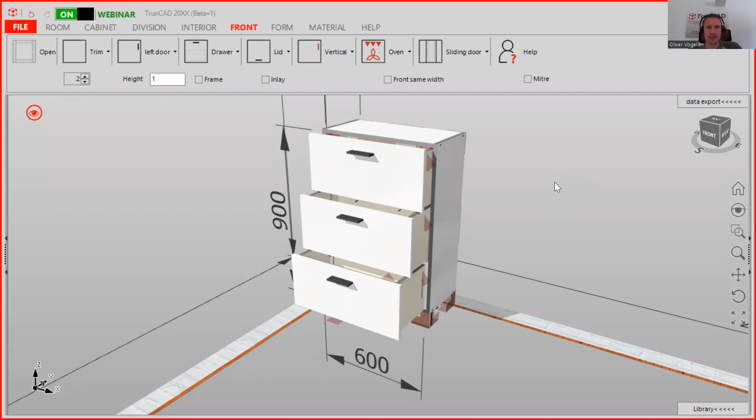Today, you're going to see how to set up wooden drawers. We are here on the front tab and here on drawers. Today the main theme is how to configure your individual wooden drawer. You find it here when you click on this button. You get in settings, and we will go step by step through it.

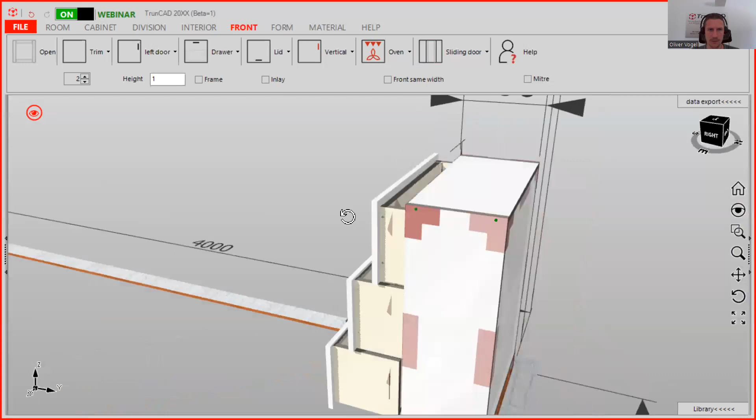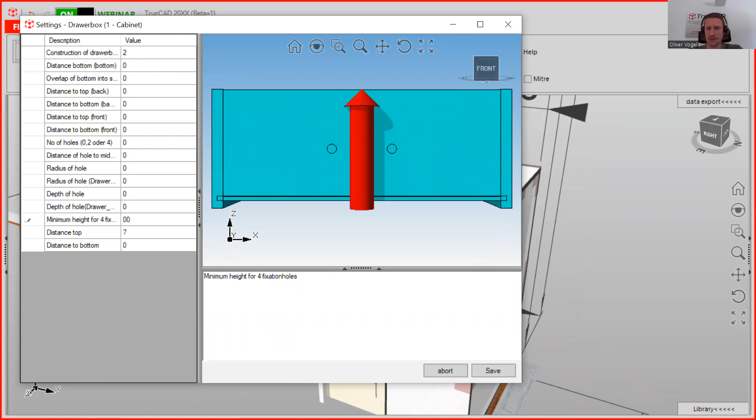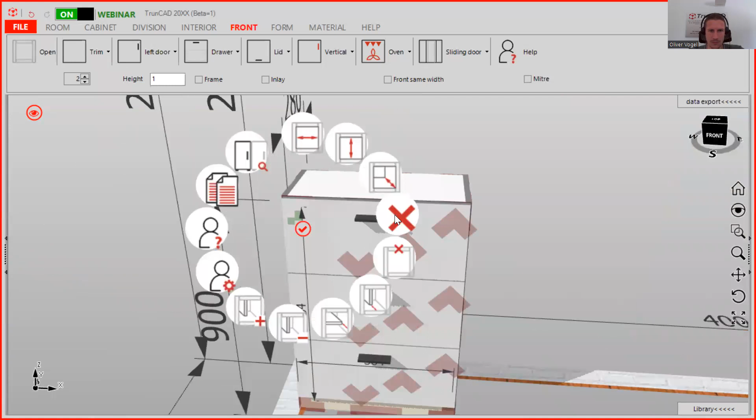So, first of all, I click here again and I set this to 0, so that we can go step by step through it. So we save this. And you see here it's also already changed. So we can close the doors and we are starting a new project.

So first of all, when you make the setup of the drawers, you click here on the front tab and here on the drawer. And here we have the setting for the drawer box, here for the hardware, and here for the connectors. Today we focus on the drawer box, but I also explain what you need to consider in the hardware.

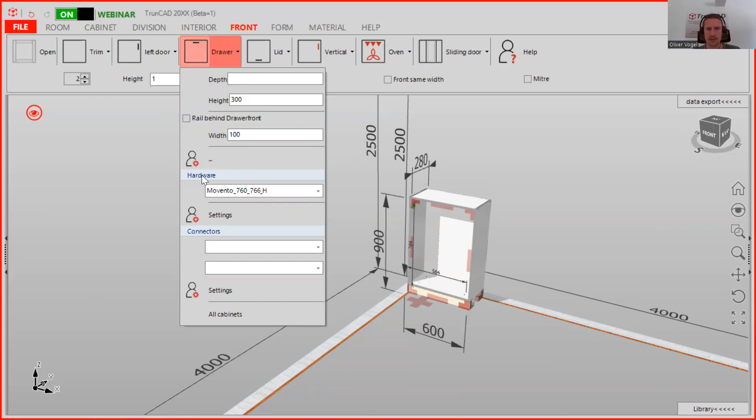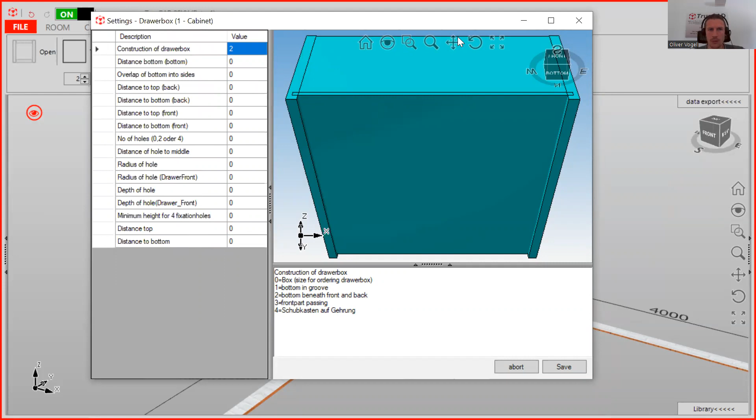So we click on here, and here you see the setting, and you can also click on here to move this. First of all, it's important that you know which construction of drawer box you use. You see here the description, here's the value, here you see the picture, and here also the code. What does 0 mean? 0 means just to have the size for ordering a drawer box. So when you don't manufacture it yourself, you just type in number 0.

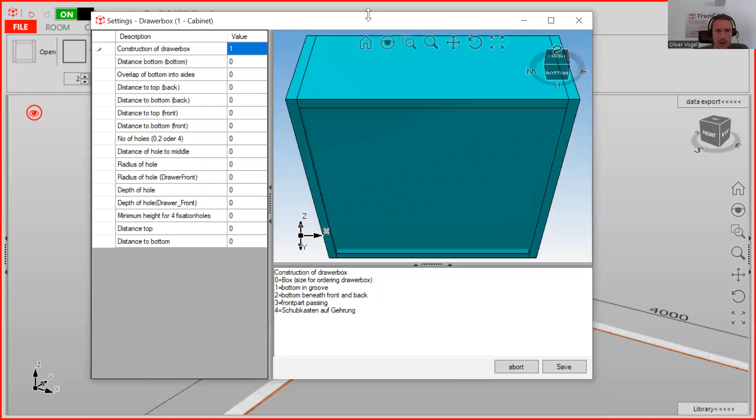When you want number 1, you see here the bottom is in a groove and the sides are going through. When you type in number 2, you have the bottom beneath the front and back. And when you have number 3, it's similar to the first one. Number 1, the sides are going through. Number 3, the front is going through. And number 4 is on miter.

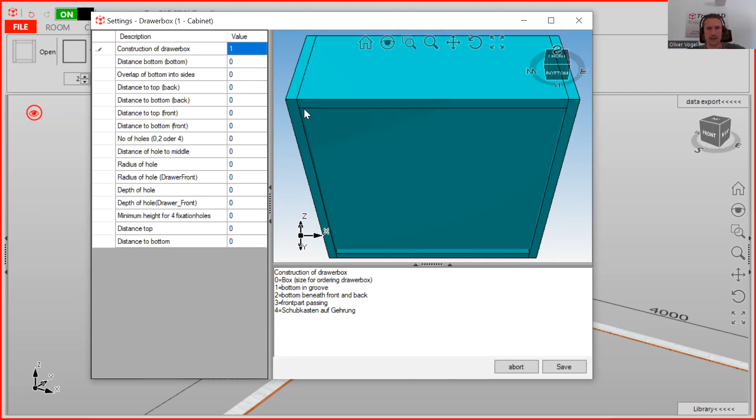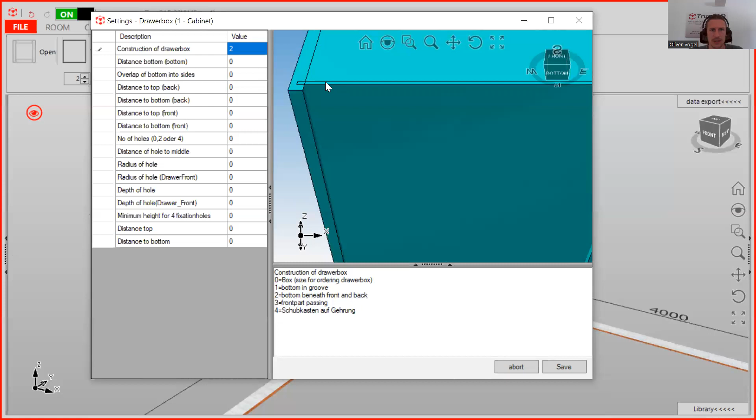Today we use the example of number 2, and you need to consider something, and I show you later on what. Because here on number 2, you see we can have a distance, and later on this will be important to consider. So let's choose number 2, and here you can type in the distance to the bottom.

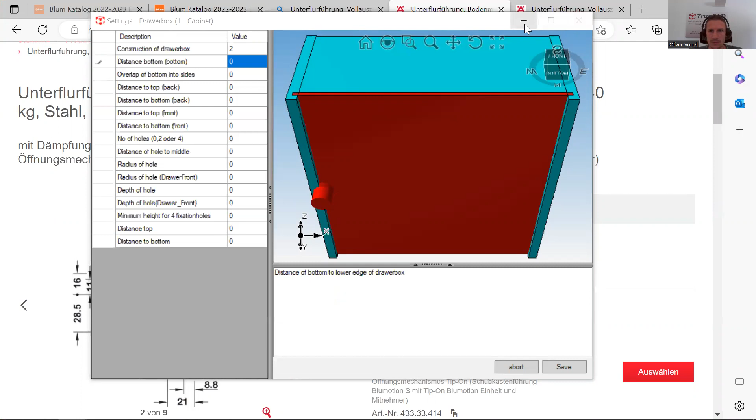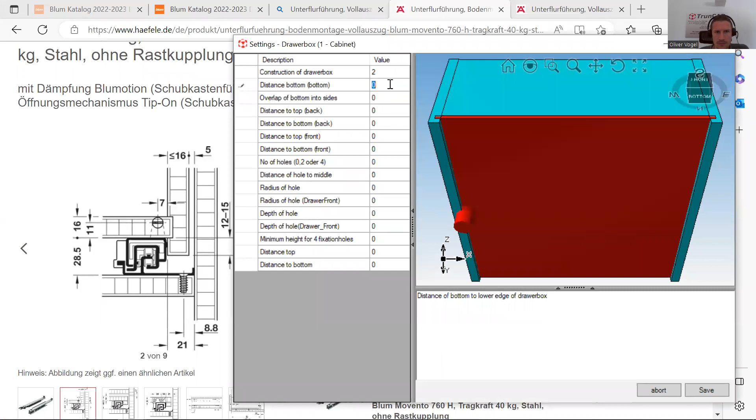Therefore we also need to check the catalog, because we want to use the Movento 760H. And here you see we need to have a distance to the bottom. It has to be 12 to 15 mil. So that's why we choose in our case distance bottom 12. So here that is the overlap of the bottom into the side.

You see it here also. When you click here, it's actually the groove. We want to have the groove, and we just type in 6. And here's the distance top to the back, and we type in 2. And for the bottom, we just keep it 0. And that is the same for the front. We can also type in 2 mil, and the distance to the bottom we can have 0.

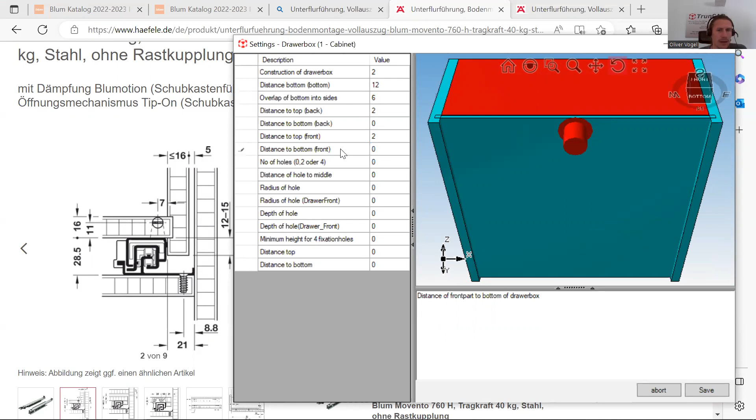So here you see the number of holes. You can have 0, 2, or 4. When we type in 4, you see we get 4 holes for the handle. Here you can also set the minimum height for fixation holes. So you can type in like 250. So when it's smaller than 250, then you automatically get 2 instead of 4 holes. That is then automatically set up.

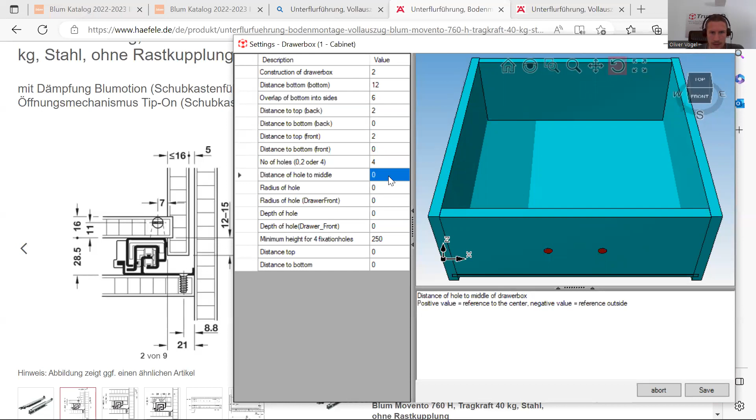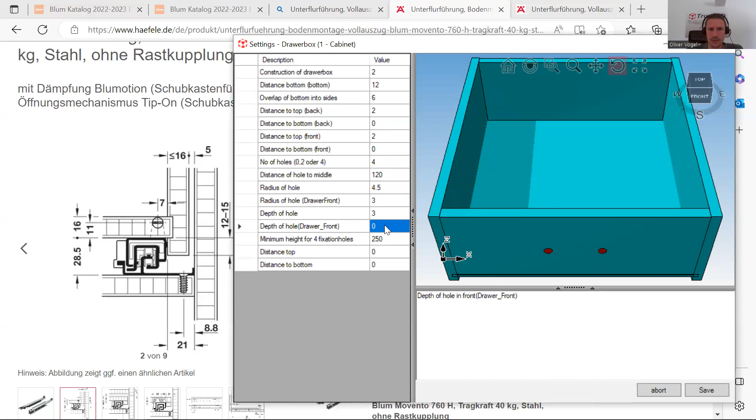And here that is the distance of the holes to the middle, and we can type in 120. Here you can define the radius. We just type in 4.5, and that is the radius of the hole for the drawer front. It can be 3, and that is the depth of the hole. We can have 3, that is just for fixing, and the depth of the hole for the front. When it shall go through, you can type in 1, then it's going through.

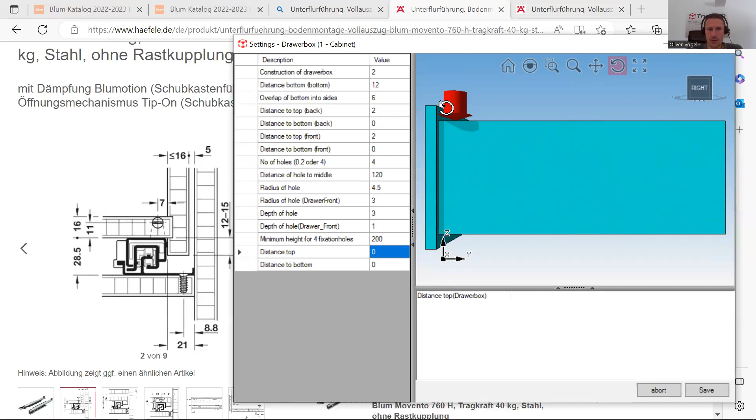So here we have the minimum height. You can also type in 200. And this here is the distance to top, from the drawer side to the top of the front, and we will check it later on. We type in here 7. So when this is set up, you can click here on save, then it's saved. Now what's also important to consider is that we check the measurements.

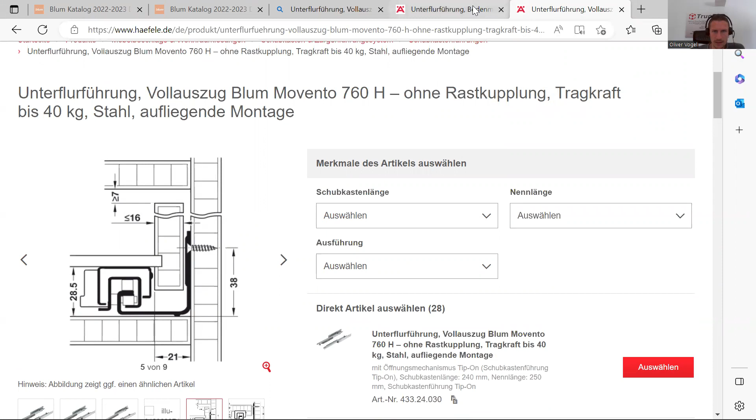So here we have the first drilling to the bottom, which needs to be 38. And here we need to consider, you see here it's 28.5, the distance from the bottom to the shelf here.

So we will go back to TrunCAD, and we go here into the hardware setting. Here you can also choose the Movento 760H. Choose the wooden drawer here, and here you can choose this. And what's important, when we click on here,

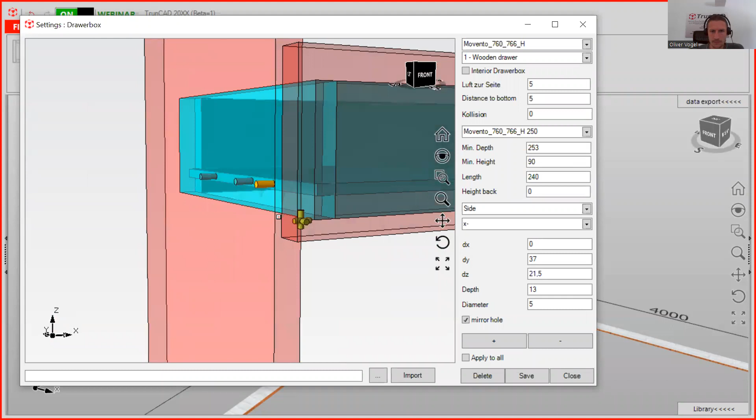you might be confused, because here you see the reference point. The reference point is here on the bottom of the side. And here the distance is 21.5.

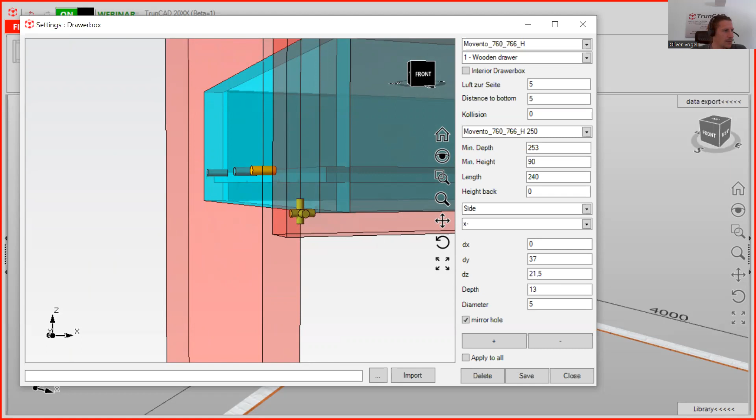So I go back here, and we need to consider this: 28.5 minus 12, that is 16.5. And this 16.5 we need to have here as the distance to bottom.

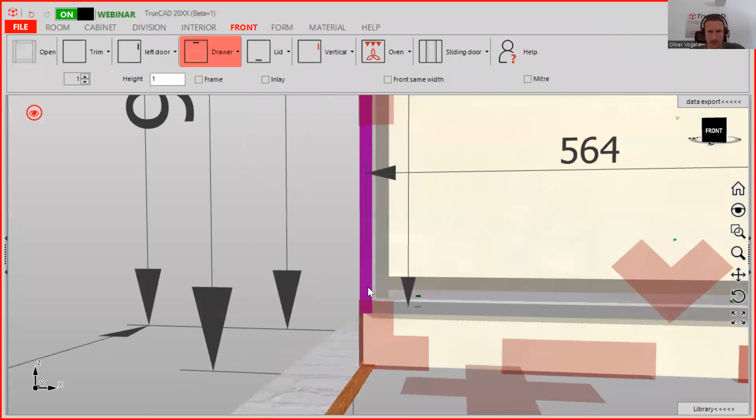So we close this, and I will drag and drop one in here, and then we will make the front visible. Now we zoom in, and you see, when you keep the Control button pressed, we can measure this distance here. That is 5 here, and we need to have 16.5.

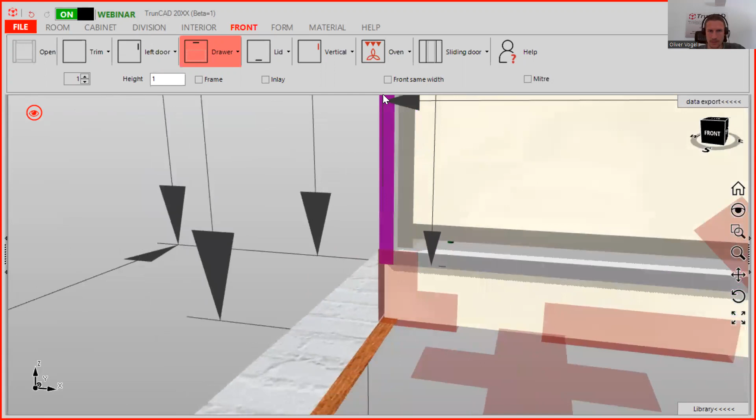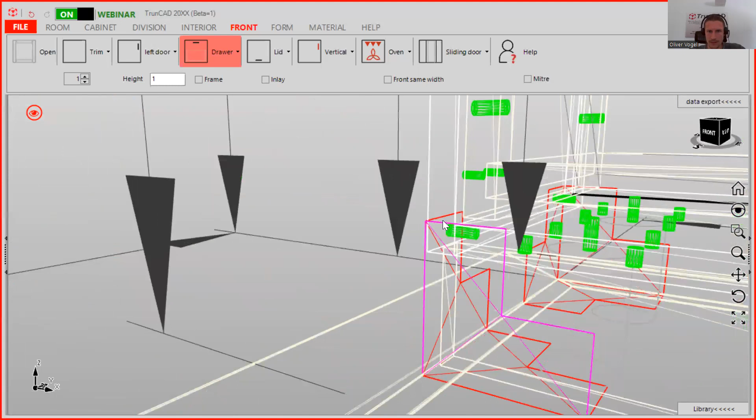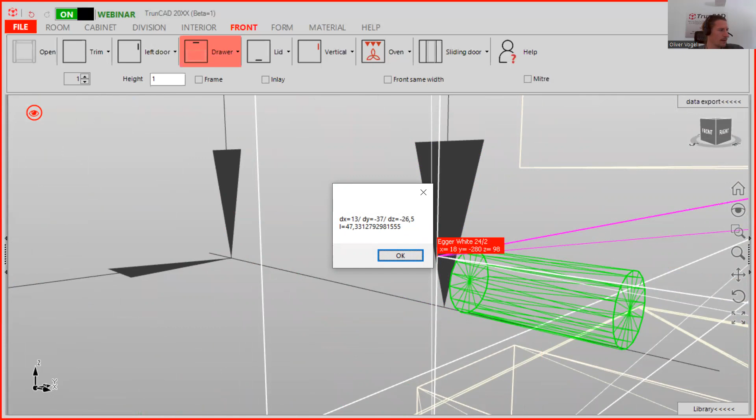Because we go here to the wireframe. So that is the middle of the hole, and that is the distance to the bottom. At the moment it's 26.5. But when we go back to the catalog, this should be 38, and at the moment we just have 26.5. I also calculated it again.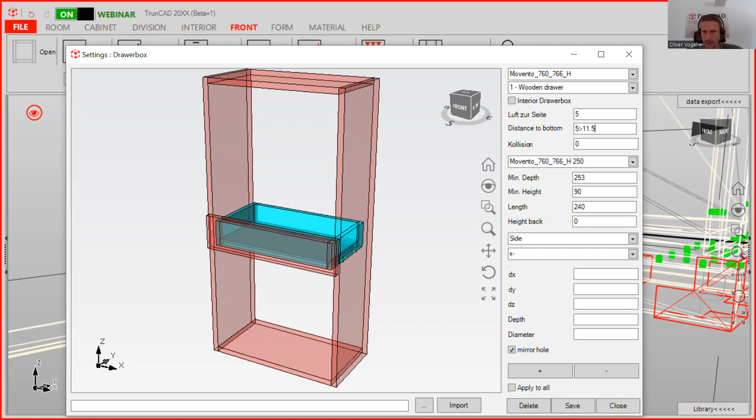You can click on here. When you want to change it for all sizes, you just leave it like this, 5, then you use a greater-than symbol, and then you type in 11.5. Then make sure you have a tick on apply to all, click save, and confirm it with yes. Then you can close this.

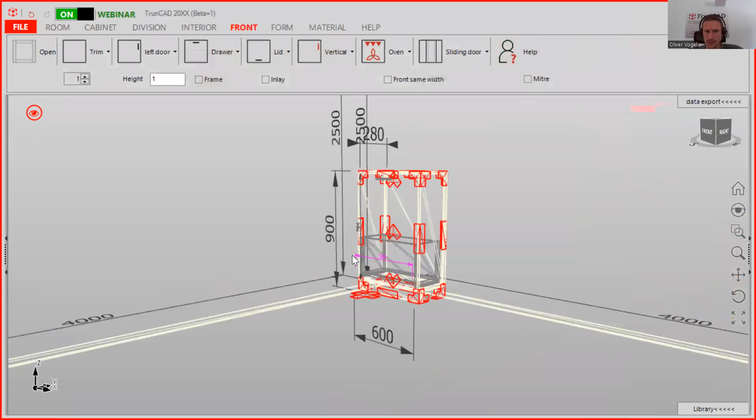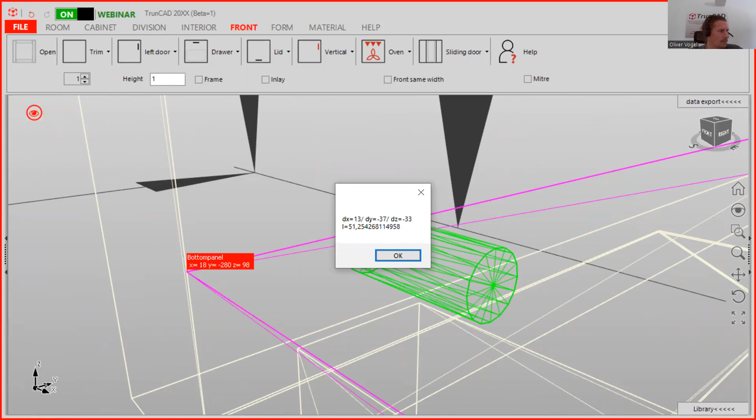So now we measure it again. We go here to the center, and now here to the bottom. And it's now 33. But we need to have 38. So we need to add 5 more.

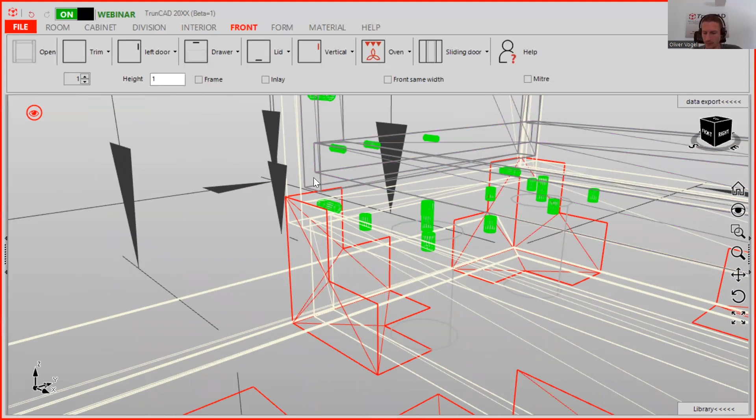I confused it, and I know why: because we had 5 before. That's why we need to add 5. I didn't calculate the 5, because before we already had a distance of 5 here, and I calculated with 0.

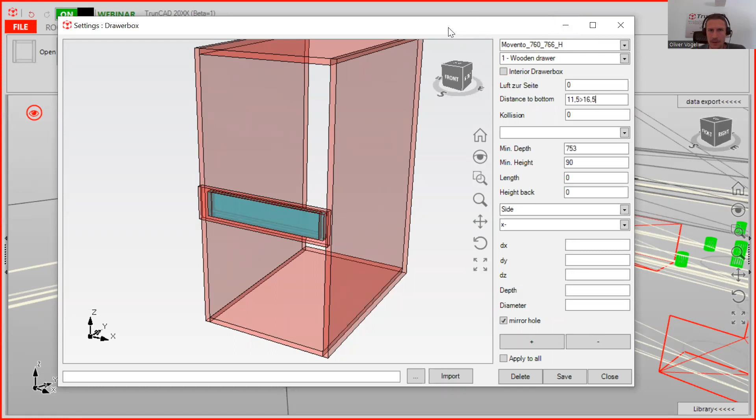Here it was 5, so 11.5 plus 5 is 16.5. I also noted it down in my notes, but I was confused that it's 11.5, but that's because I didn't calculate the value 5 before. But it's also okay. You can learn from mistakes as well.

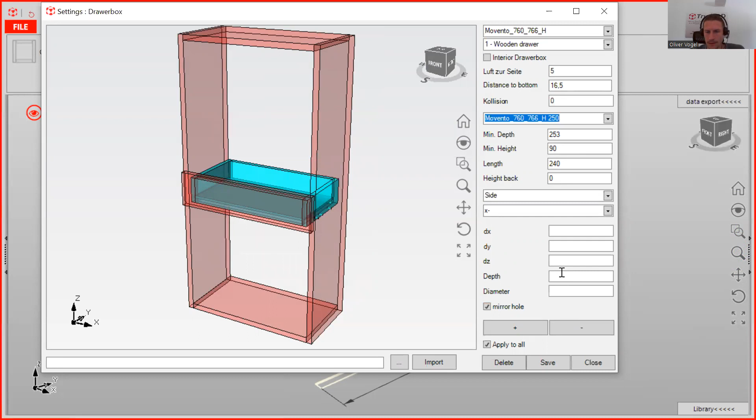Then you tick apply to all, and then you can save this. Before that, it's also important that you choose one of these. And now you see distance bottom is already 16.5, and you can go through it, and it's always 16.5. You can save it and close it.

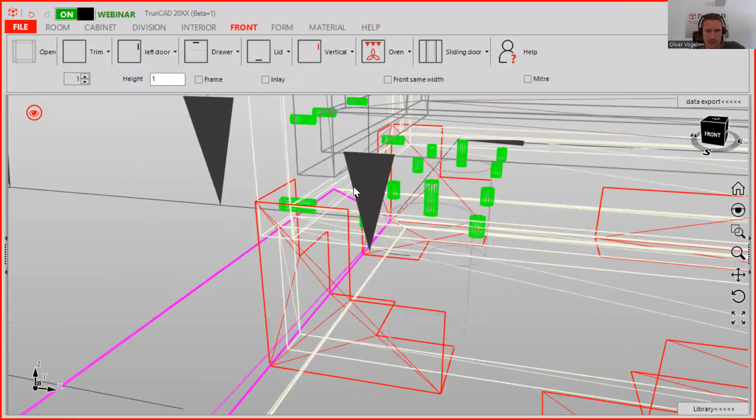And now we measure it again. Keep the Control button pressed, we go here in the middle, and then we pick this point. And now we have the distance 38, like we want to have it in the catalog. So that is important to consider. All right.

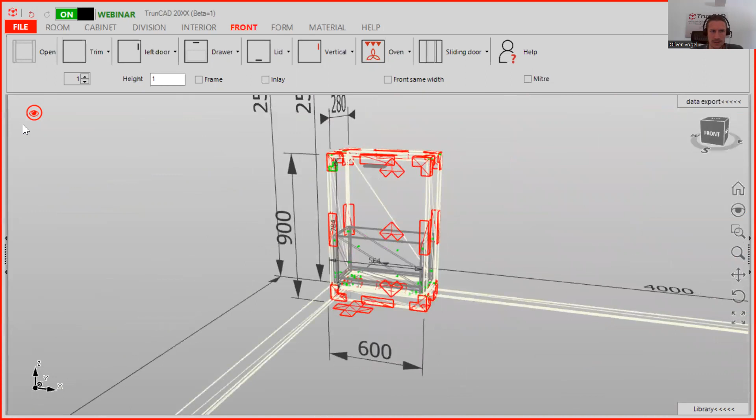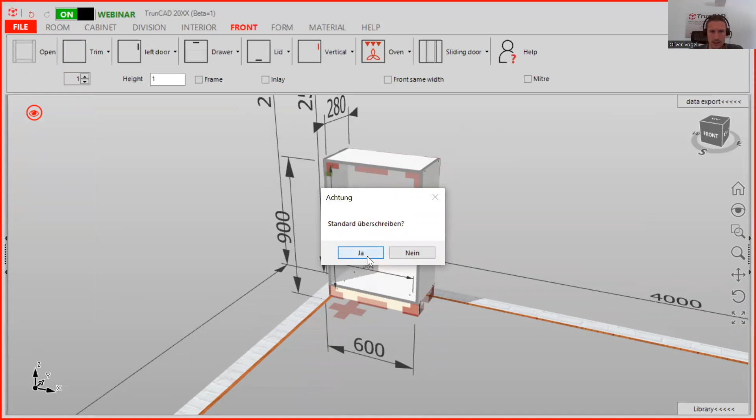When this is done, you can also save this as your default. Because when you click here on drawer box, it's saved in this project, but it's not saved as a default. You click here, go back to the rendered view, and here you can delete it. Then you click on File and Save Standard, and click yes. And now this is the default.

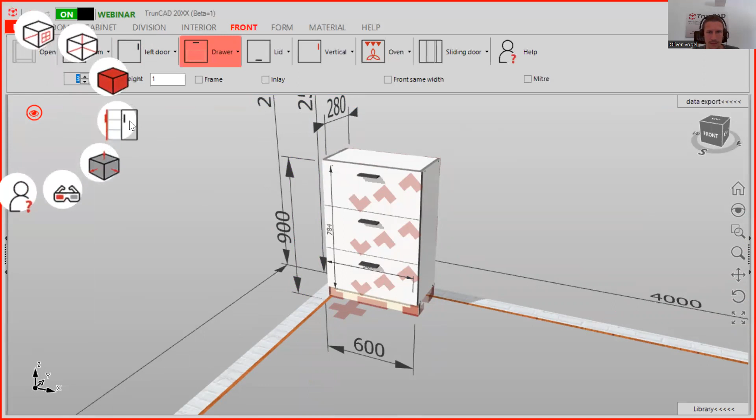So, all right. Then we can just drag and drop 3 drawers into it, and we will make the front visible. You see they are now related to each other in a 1-to-1 relation. We can also draw it open.

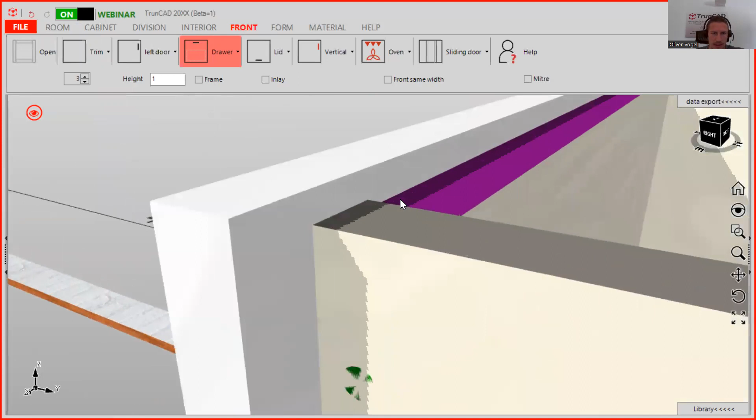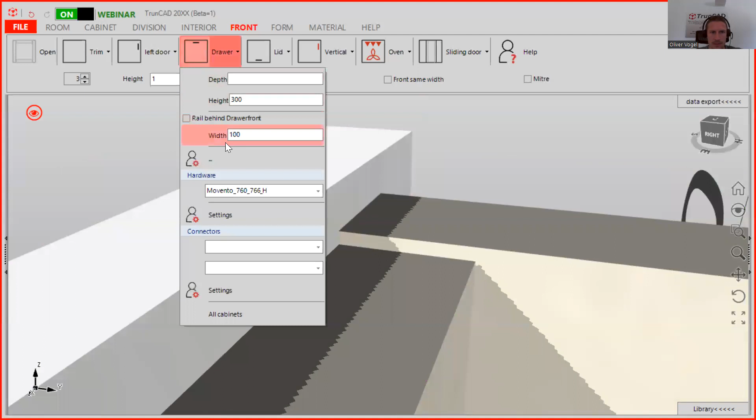And when you scroll in, you can also measure here: that is 2 mil. And from here to this point in Z it is 7 mil, like we have it here. That was the wrong button, so we go here.

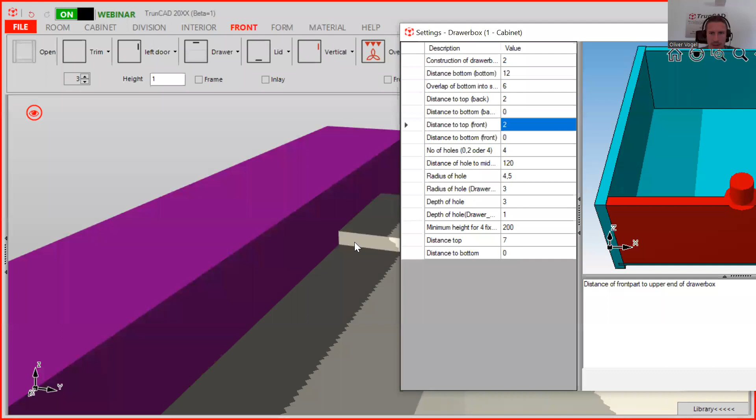So here that are the 2 mil. Yeah, the distance of the front part to the upper end of the drawer box. Here we have 2 mil, and this here is the distance of the top. Yeah, that are the 7 millimeter. So you can set up your drawer box individually and can also check it. It's also important to check it.

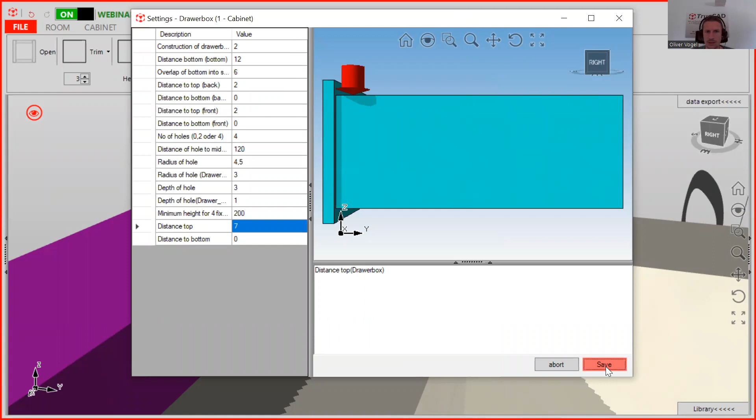And when you are confused or something isn't working like you want to have it, you just click on help, and here you click on web form and create a ticket. Here it's important to attach your hotline zip file, which you find here in the software folder, and here TrunCAD 20XX, and here is the backup, and here you see the date today, the 22nd of March, almost 3 p.m. German time.

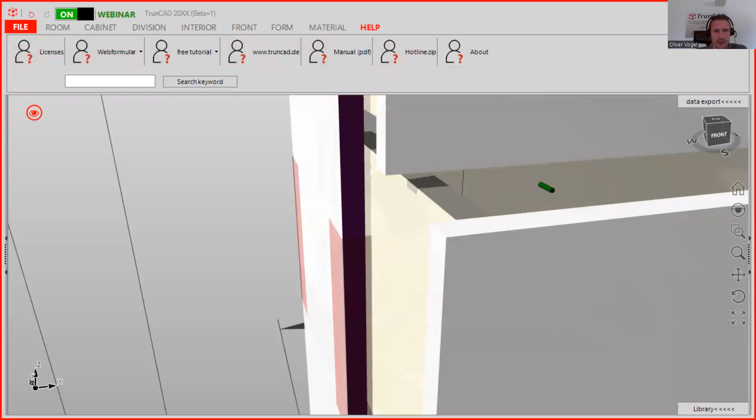Because here in the hotline zip file, I show you, when you click here on help, you also get the hotline zip file. There's also saved the hardware. That is here the hardware file, and we need to have your hardware file to check your issue. Then we can also load your setup and help you. All right, so that is most important.

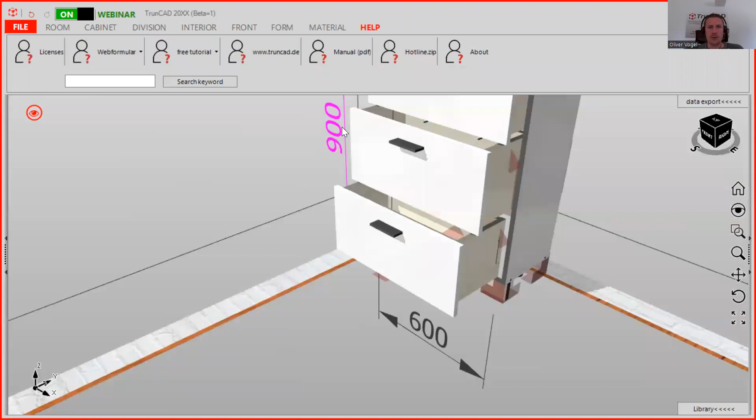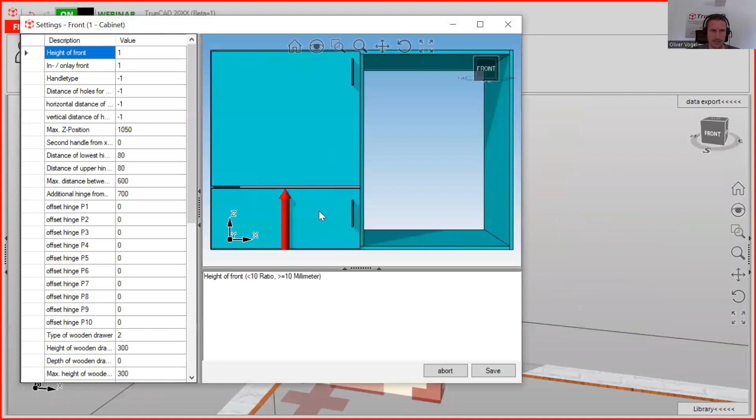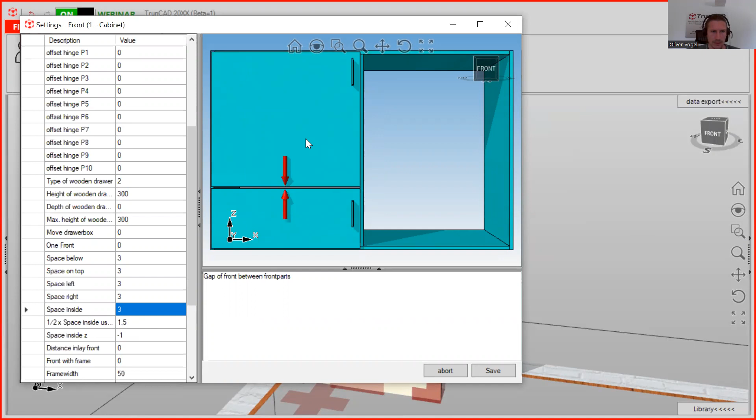Now I also show you other things what you can do, and therefore we draw the fronts visible. When you click here now on a smart click for the front, you can also go here in the setting, and when you scroll down here, you see you can change the gap from the drawer front to the bottom, to the top, to the left side, right side, space also inside. So, and this here is the space. I showed it 2 weeks ago. When you have like double fronts, you can change the space also separately.

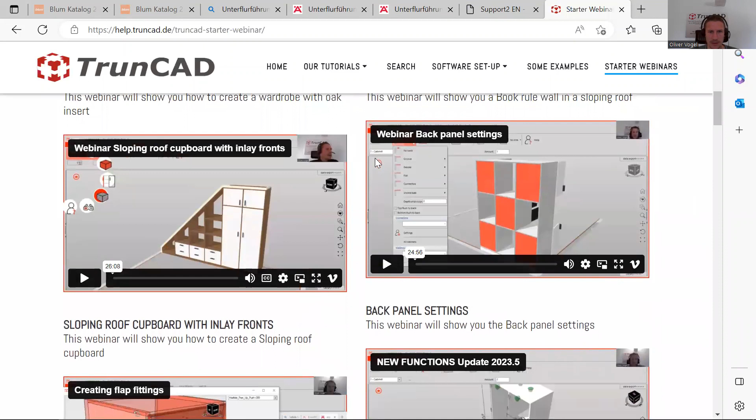So you find out about this also when you click here on help and on free tutorials, and here Starter Webinars. It's not uploaded yet, but it will be uploaded here as well. And then you can watch both. And next week or the week after, there will come the next webinar also about the drawers, about the hardware.

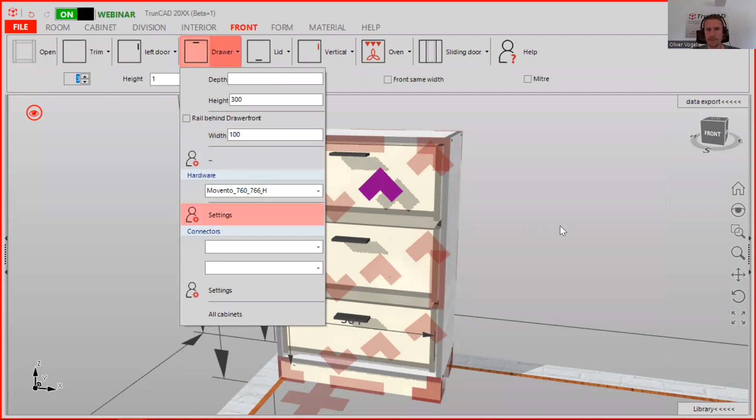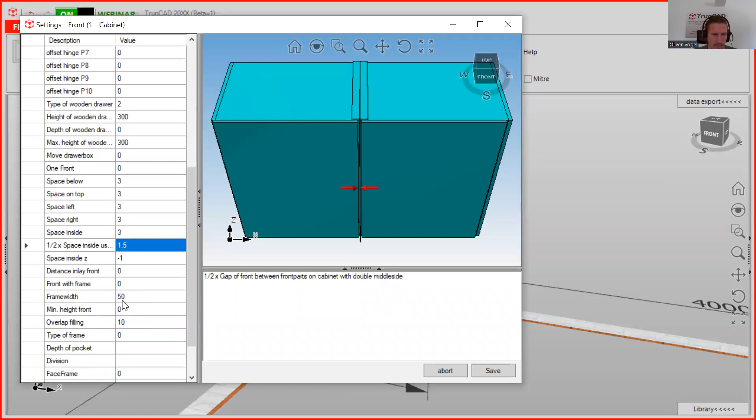So, one more thing what I wanted to show you, it's here also in the setting of the drawer fronts: the maximum height of the wooden drawer. You also need to check this. I have here now 300, but when you have like 200 and you save this, then you see the drawer boxes didn't get bigger than 200. Then you automatically have for sure a bigger space.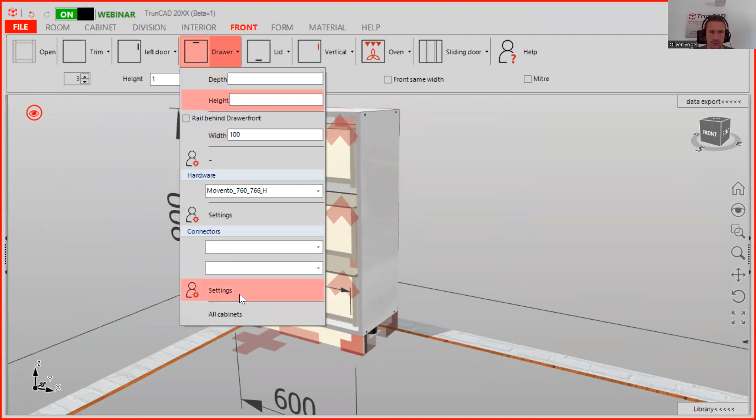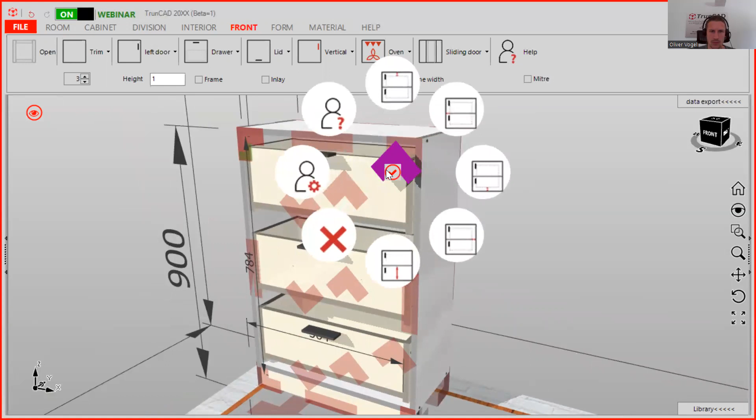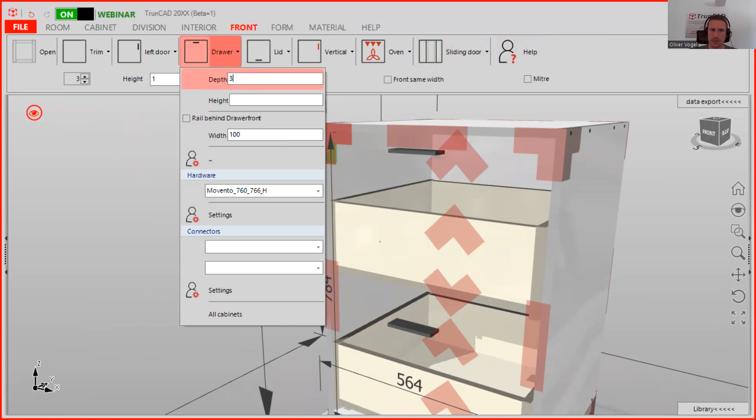And you can also do it here, and when you keep this empty, and also here when you type in here -1, then it's overtaken the value, and now we delete it. So, for example, when you have here 550, you see the boxes are automatically adjusting. And when you want to have here just maximum 300, and you drag and drop one in here, then you see it's here smaller, maximum of 300.

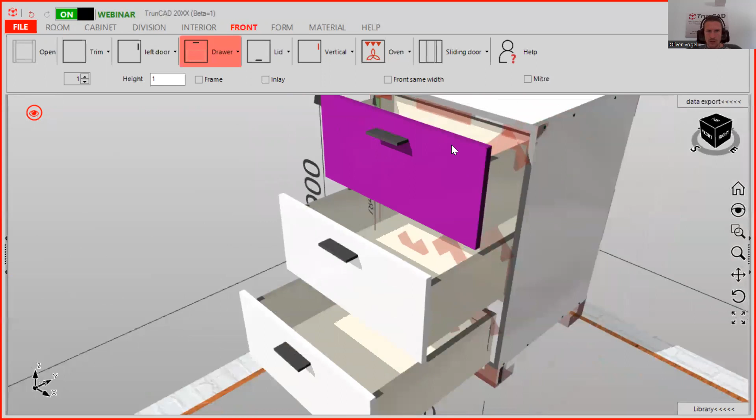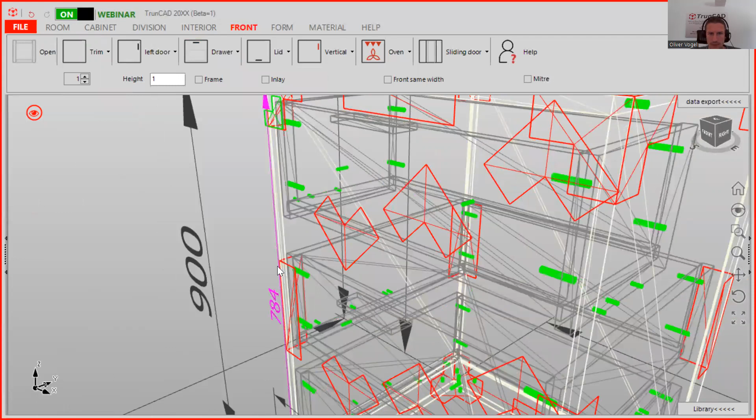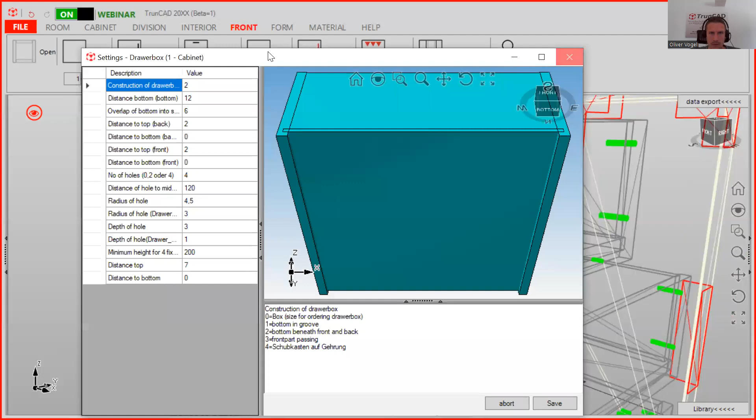So, all right, when you want to set connectors, you can here also choose connectors. Therefore, we go here in the wireframe. You see the drawers don't have connectors. And here you can also set dowels if you want. And here you can also set dowels in here. So that is fine. When you keep this empty, then the dowels are here disappearing.

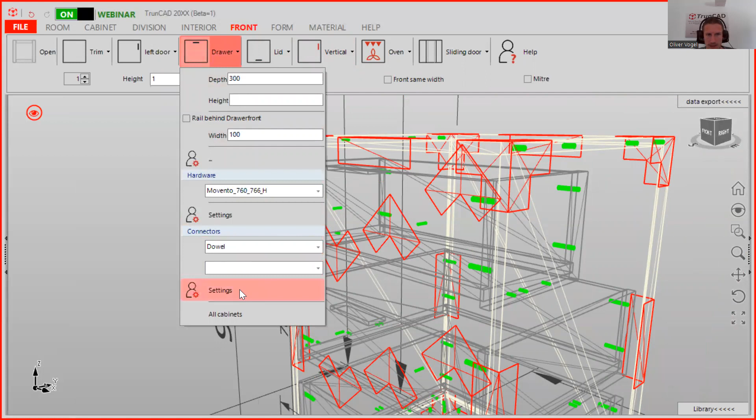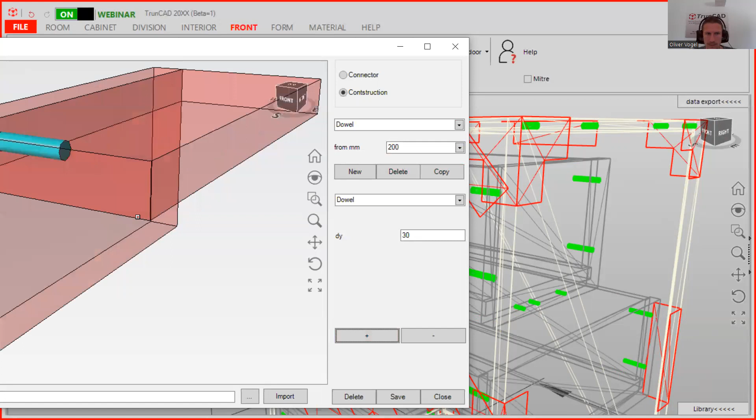And let's say you want to have here 3 instead of 2 dowels, then you click also here. You need to go to the setting here for the dowels. You see now we have here 2 dowels, and you can click here also on dowel, and you see here from 100 and from 300 you actually have 5. So you can here create new from 200, and you click here new, and then you can choose a distance, like here 30 here and minus 30 from the other end.

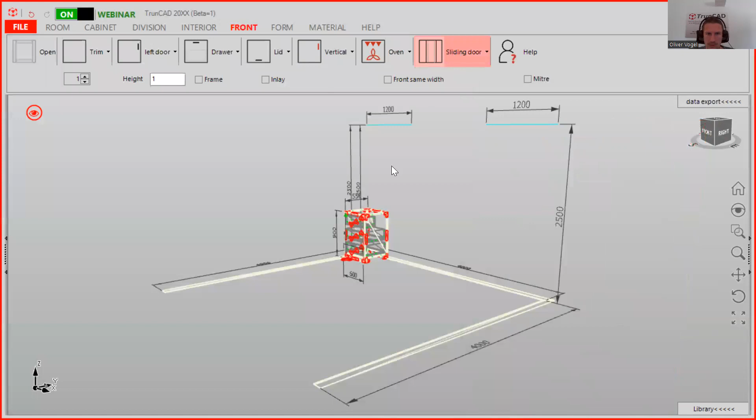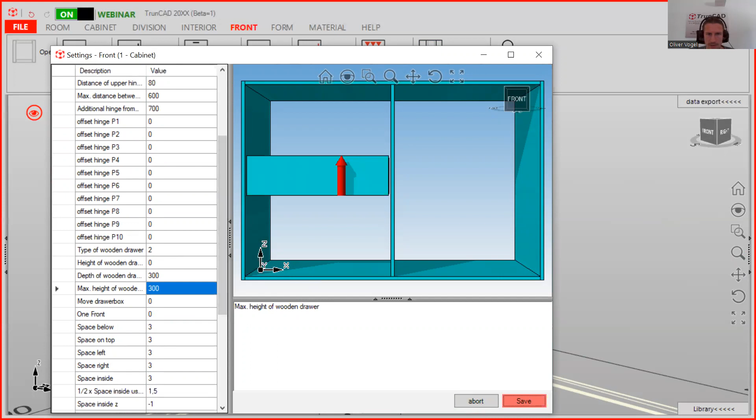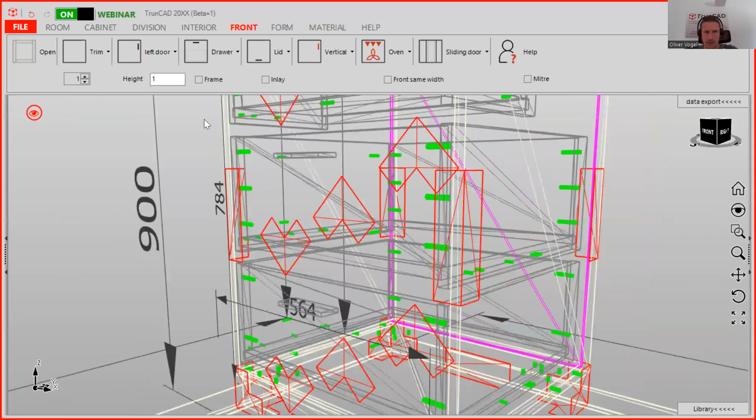And here 0.5, one more in the middle. And then you just click here on save. And now you can close it. So, and now you need to click here in the setting again, and we change this here to maximum height 300. And now you see here we have 3 dowels instead of 2, when the height is bigger than 200. When you click here again,

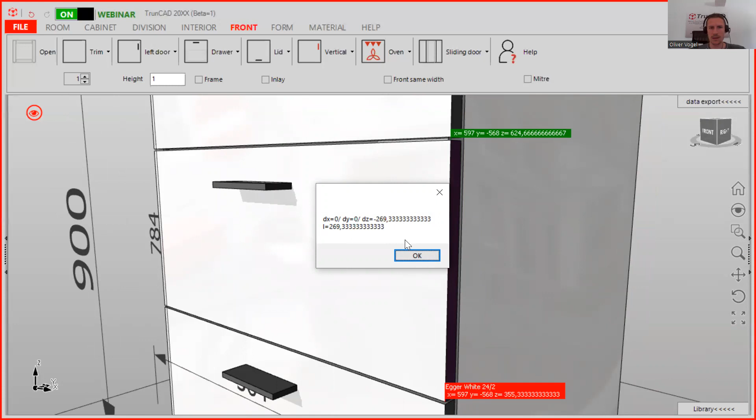as it is here 269. When you go here to the wireframe, I think it's actually taking this.

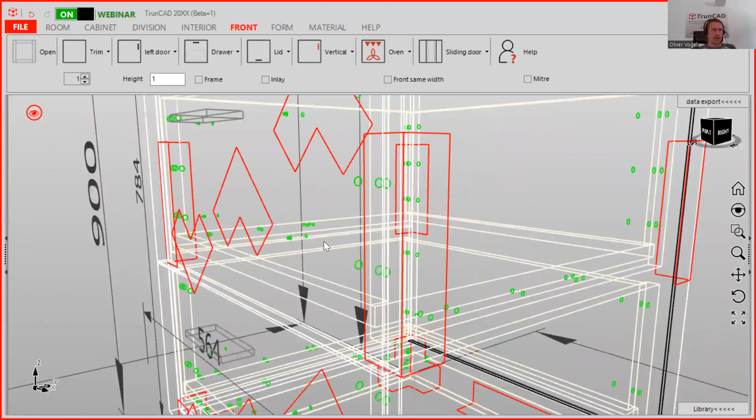If there are no more questions, then we are done for today. Here you see also in the wireframe the gap to the back.